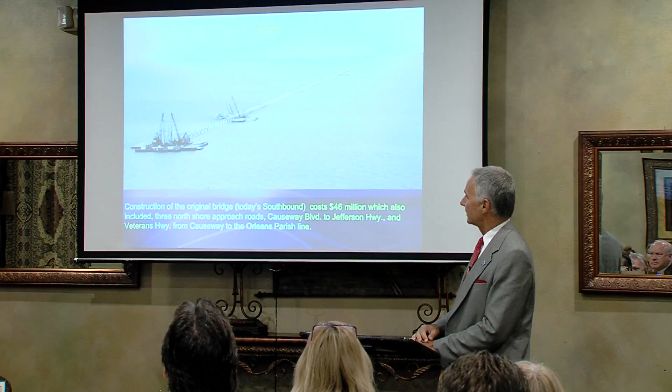History: the bridge was completed in 1956. It is still the longest bridge in the world, despite what the folks on the other side of the planet would like to say. The causeway was not only the longest bridge in the world, it was the first use of pre-stressed concrete for any bridge anywhere on the planet. It was component construction, and it was built in less than two years - the entire span was constructed. There were three basic elements: the piles, pile caps, and then the entire deck section.

The pre-stressed construction site is now presently Port Marigny. That was the construction site not only for the causeway's first span and second span, but for all of the Interstate 10 system bridges along the Gulf Coast. It was a design base for all of them, so it was really cutting edge. The first bridge cost $46 million.

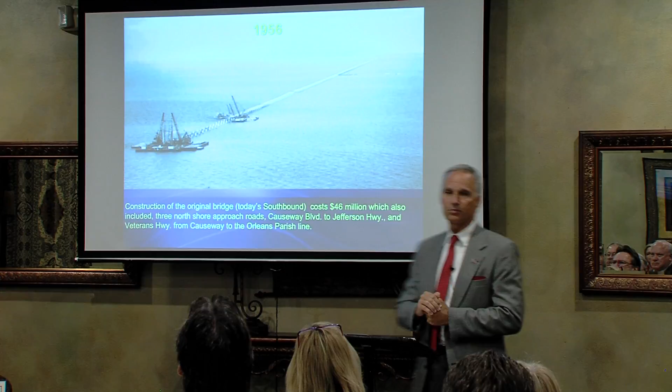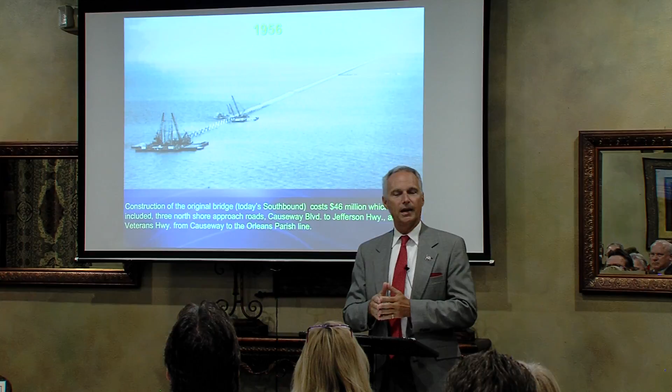That included not only the bridge, but also paving what is Causeway Boulevard today, from the toe of the bridge on the South Shore to Jefferson Highway, what was then Veterans Highway, from Causeway back to the New Orleans city line, and on the North Shore, North Causeway all the way to Covington, and both the east and west approaches.

1969, traffic had come up. Initial traffic was about 50,000 cars per year. By the late 60s, it was up to 2 million cars per year. At that point, the second parallel span was constructed. It was an additional $30 million. Again, component construction, less than 2 years to build the entire bridge.

If you drive the bridge, many of you tell me about the thumpity thumps on the southbound bridge - they're there, no two ways about it. Remember, that first bridge was the first use of pre-stressed concrete anywhere in the world for a bridge. All engineers design a factor of safety into all your projects. Because it was the initial use, the factor of safety was actually greater than typically used, and that's why you've got a larger camber in the southbound bridge, causing the clump, clump, clump between the deck sections.

Those deck sections are 56 feet long. On the northbound, the '69 bridge, they're 84 feet long. So the technology in that 13-year period had improved - the deck sections became longer. The camber is actually less on the longer sections, and that's why the northbound bridge gives a much smoother ride.

Financial history: the original bridge was $46 million. The second bridge, '69, was $30 million. The bridges were refinanced 5 times - '73, '86, '92, '99, and 2003 - either for ongoing maintenance or for major improvements. The primary major improvements that are visible would be on the North Shore, the Monroe overpass and the intersection at the toe of the bridge.

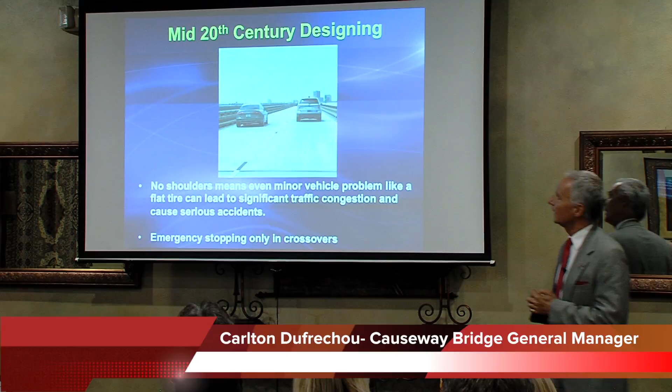20th century design. The bridge was state of the art when it was designed. The southbound bridge was designed in '54, '55, completed in '56. The northbound bridge was designed in '66, '67, completed in '69.

The biggest problem we have out there today is we don't have shoulders. Shoulders on bridges at that period were non-existent. The only emergency stopping areas we have on the causeway are the 7 crossovers, which are 84 feet square. They were never designed to be emergency stopping areas. Think about it: you're decelerating from 65 miles an hour to 0 in 84 feet, and if you try to get out of there, you're trying to accelerate to highway speed in the same distance. They were there strictly as a crossover to get vehicles back and forth for maintenance. Emergency stopping areas are the biggest problem we've got each and every day.

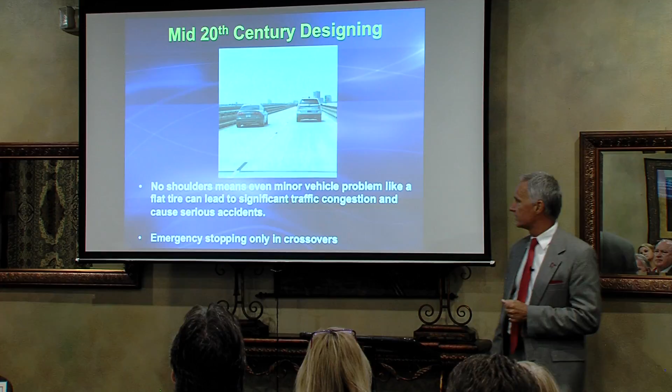If you hit it with a hammer, it will knock off. It's designed to do that. It was never designed to be an impact barrier for vehicles. It's there because, remember, there are no shoulders. This curb was designed as a haven of last resort.

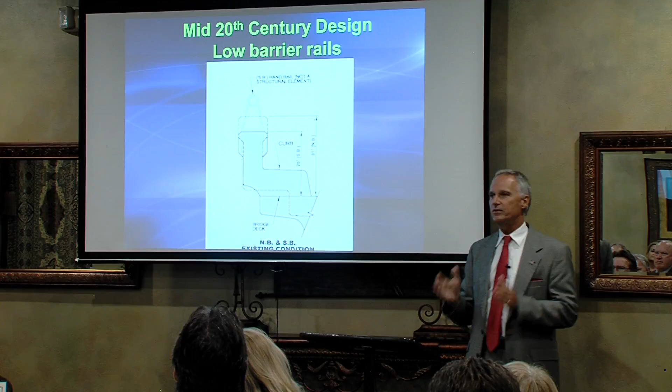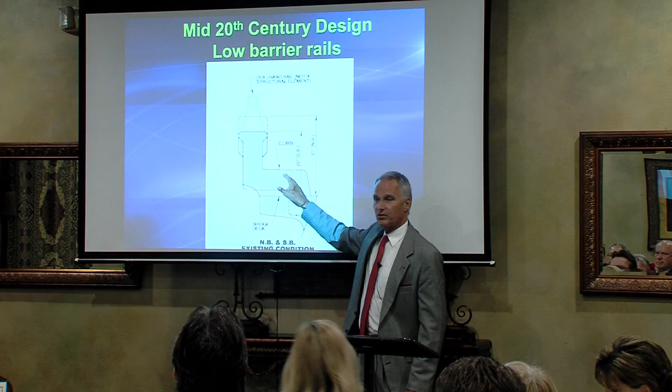If you break down, that's where we want you to go. It seems counterintuitive, but if you have a distressed situation on the causeway, like a flat tire, we want you to roll on that tire to keep going to a crossover. If the vehicle fails completely and you have to stop in the roadway, stop, turn on your flashers, get out of the vehicle, go back to the rear of the vehicle toward traffic, and then get on this curb. This is a haven of last resort from '56, and it still serves that purpose.

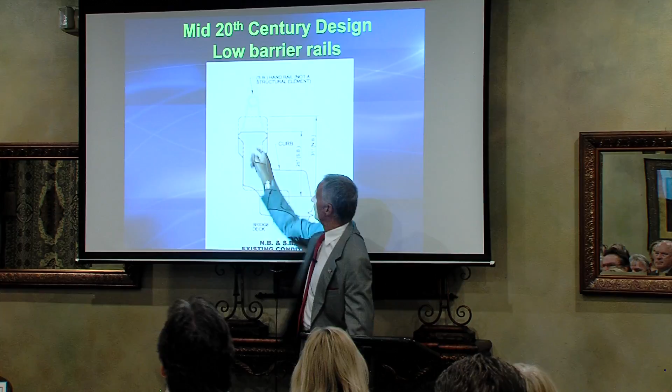It's a critical ingredient for the bridge. The northbound bridge is dotted in; the top of its barrier is 31 inches. That 6-inch difference makes a tremendous difference in safety for the vehicles of today. You'll see those in just a second.

In the mid-1990s, we started seeing a switch in the country from old farts like me who grew up with heavy Detroit iron, low center of gravity automobiles, to about 1 of every 2 vehicles on the causeway today being an SUV or personal truck. The SUVs and personal trucks, with higher centers of gravity, are designed to climb over things and curbs, and unfortunately the overboard situations we've had have been almost exclusively with SUVs.

The other challenge we've had in the last decade or so is that all of us are walking around with one or two cell phones or some kind of electronic device. It all boils down to personal responsibility — unfortunately some individuals are too tied to having these things in front of them and having to respond right away. If you're on the bridge, focus for 22 minutes on nothing but driving, and you'll get to the other side safely. Consequences of the 21st century.

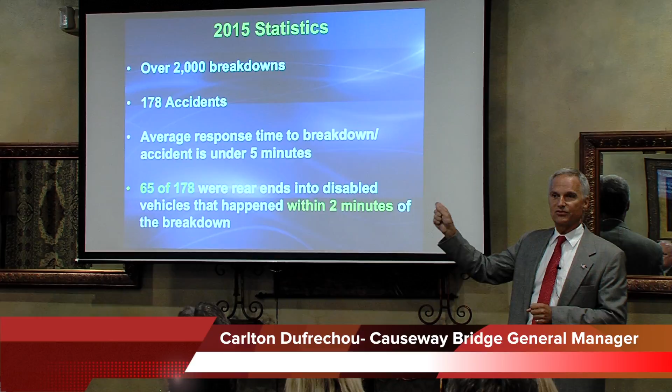Unfortunately, we've had 178 crashes last year alone in 2015. Of those, 65 were rear ends into broken down vehicles that happened within the first 2 to 3 minutes of the breakdown, before we were able to get to them. And that's the thing that keeps us awake all the time.

That's the primary reason we're pushing so hard for these segmented shoulder safety bays that we'll show you in a minute. Next one, Stace.

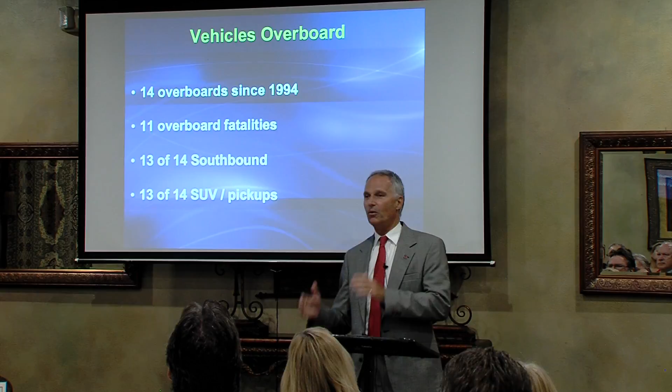Vehicles overboard: since 1994, we've had 14 vehicles overboard. Unfortunately, 11 fatalities involved in those. 13 of those 14 have been on the southbound bridge, and 13 of the 14 have been SUVs or personal trucks. The only low center of gravity automobile that went over was in a multi-car collision, a small car that was actually pushed over the southbound bridge.

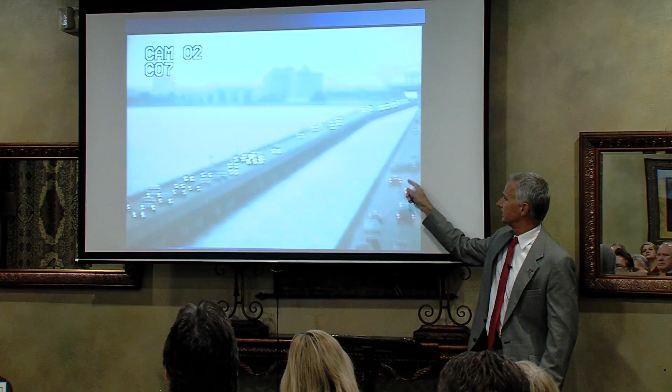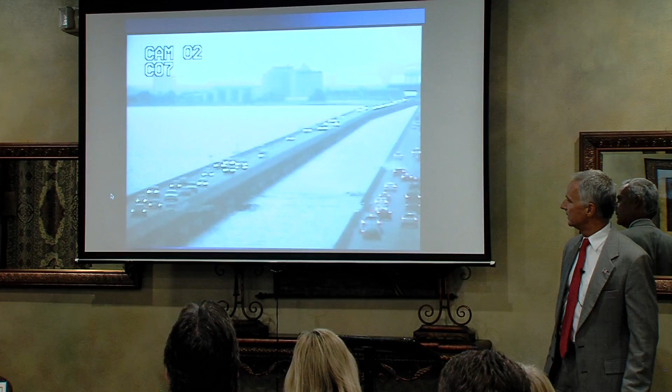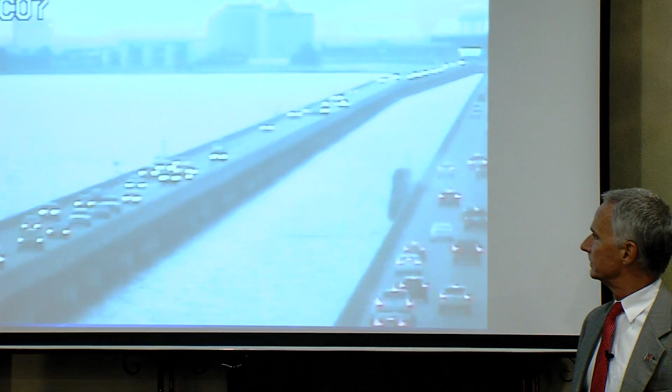Next one, Stace. Okay, watch this - it's a bit graphic. Oh my goodness. This was September of 2013, a Monday afternoon, about 4:30. It's going to be a black Ford F-250. It kisses that rail, hits this one. Unfortunately, we lost the driver.

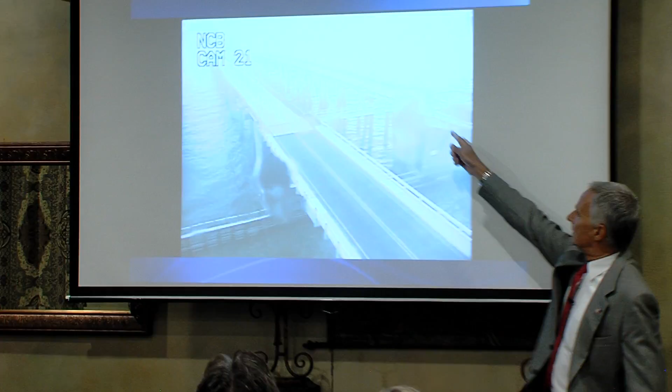Okay Stace, this next one's going to be even a little bit more. This was in November of 2014, a Sunday morning. Did they hit the side rail? Yes. Go ahead Stace, do it one more time.

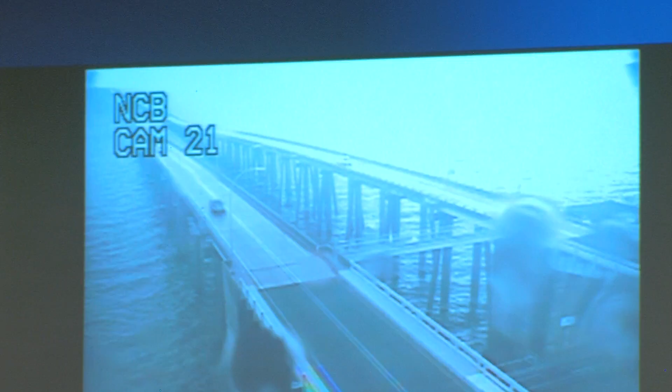That's northbound. This is going to be southbound - we're looking south right now, Lacey. Is it raining? It was wet, it was slick - the rain had stopped, but it was still slick. Okay Stace, let's go forward. Watch this - crystal clear day.

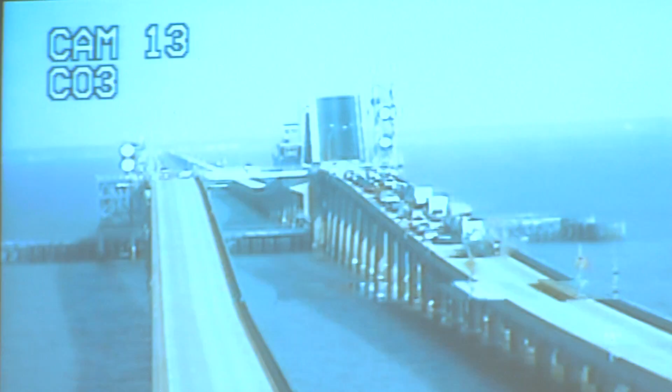The vehicle that was hit was a Jeep SUV. The lady that was in it, unbelievably fortunate, was pushed into the back of a lowboy. It started to cut into the cockpit of the vehicle - they had to cut the vehicle apart to get the woman out. I think she was hurt, but she made it, thank goodness. Those are the ones, particularly those rear ends, that concern us so much.

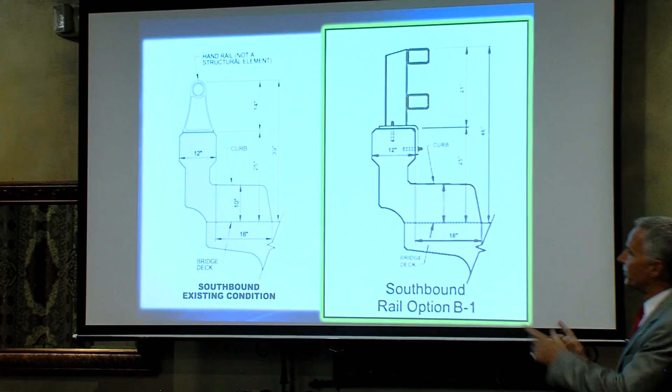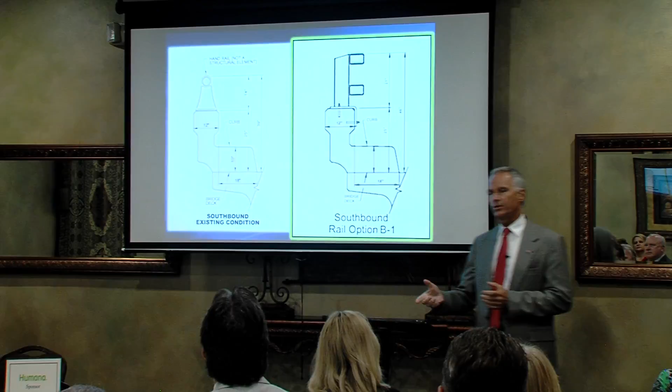Go ahead, Stace - solutions for the 2 bridges, the rails. I think you've seen a lot of the media. We started working originally over 2 years ago with our consulting engineers, then with the Department of Transportation and Development. DOTD actually put us onto the Texas Transportation Institute, and some of the crash tests they've helped us with. They've come up with 11 different alternatives. This is the selected alternative recommended for the southbound bridge.

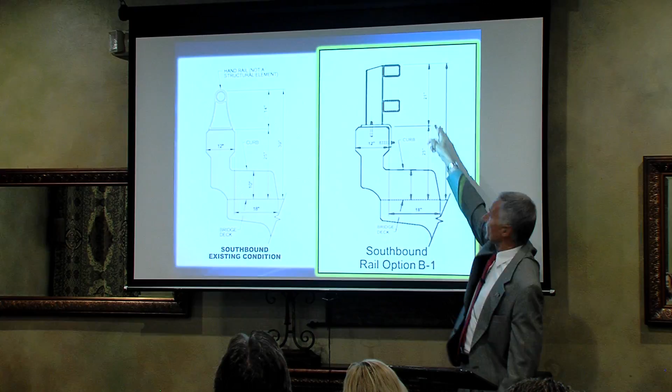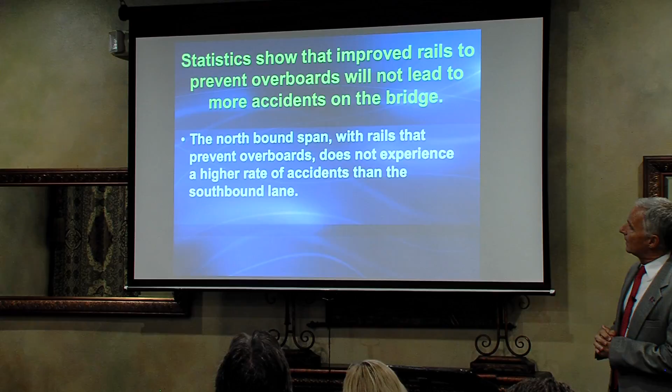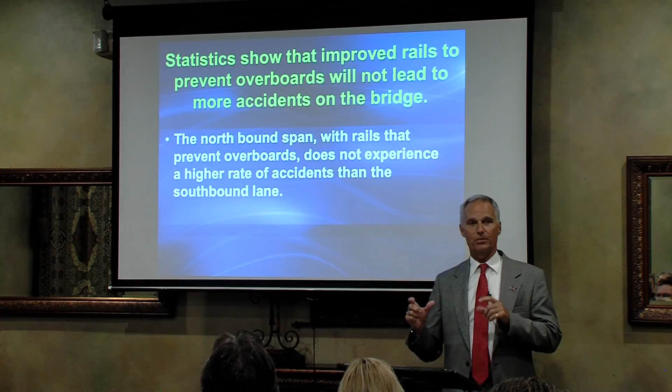Keep going - statistics. Some of the questions we had: if we put the rails on the southbound bridge, would that induce unintentional consequences, actually causing more crashes on the southbound bridge instead of vehicles going over? Statistically, if you look at both bridges over the long term, we've got almost the same number of accidents on the northbound bridge as the southbound bridge. So if that were the case, we would see more impacts right now on the northbound bridge, which we don't - more crashes or more fatal incidents, which we don't.

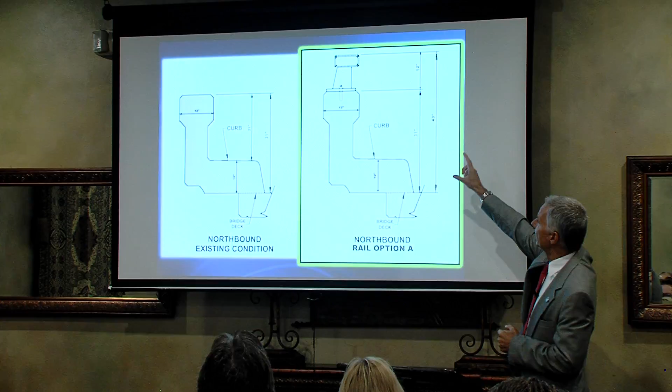Next one please, Stace. Northbound bridge, again, this is 1969 vintage. To get it up to current standards, A&M is recommending going with a single rail option that you see right there. Go ahead, Stace - that's the artist's rendition of the northbound bridge.

Keep going please. Segmented shoulder safety bay - this is where I really want to go. Remember those breakdowns, the 2,000 plus a year, the 4 at least a day? Right now we've just got those 7 crossovers, 84 feet square. The best of all worlds for all of us on the causeway.

Our dream sheet for the staff and the commissioners is to add continuous shoulders on the entire bridge. That's $1.8 billion. I'm an optimist, but that's way above my optimistic level and all the good praying we could do. Trying to be as pragmatic as we can, we're proposing - or referring to them as - safety bays.

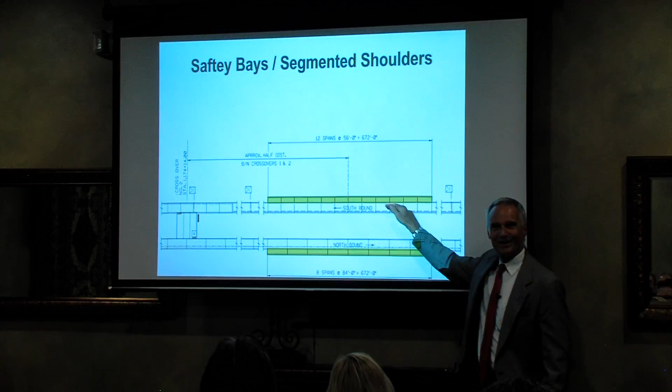They're basically segmented shoulders. These would each be 2 blocks long, 672 feet long. They would be placed mid-span between each of the existing 7 crossovers, 6 northbound, 6 southbound. If we construct these, they would almost triple the emergency stopping area on the bridge. And more importantly, you can decelerate in them easily - you can accelerate out of them easily too.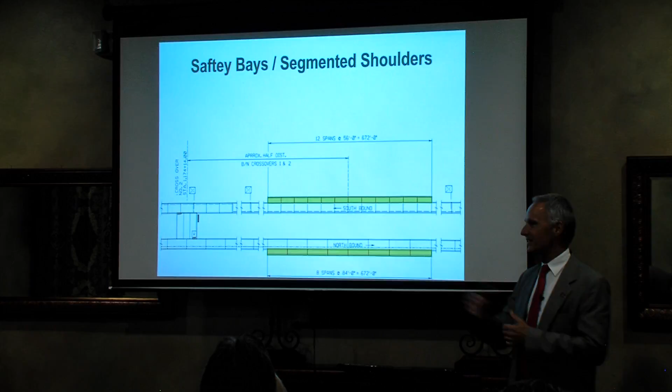They are designed so that if manna came from heaven, and Senator Cassidy and Congressman Scalise and everybody, the country's doing terrific and get all these good federal grants, you could keep going and add in between them. But these we think are...

If I had a son and I could sell that son, this is what I would sell my oldest son to try to get. These things are critical for the safety of all. I wouldn't do that, I got a little dog. Next one, Stace, that's it again, artist rendition of what they look like.

Keep going, alternatives, go ahead. Grants - I used to be semi-successful creating grants for nonprofits, but I'm not doing that great for the Greater New Orleans Expressway Commission. We've had tremendous support from the congressional delegation, from Senator Cassidy's office, from Senator Vitter, even from Senator Landrieu prior, certainly from Congressman Scalise.

They have all written letters of support to us for Tiger grants. Unfortunately, the United States government now seems to be more interested in connectivity than safety. The one avenue we're still exploring is TIFIA, the Transportation Infrastructure Finance and Innovation Act. This is actually not a grant, but a low interest rate loan.

We're in conversations with the TIFIA staff again yesterday. This could fund up to 30% of the total improvements. The problem with TIFIA is this will basically be alternative financing - you have to finance the entire project by itself first, and then the TIFIA program will come out and take out a third of that loan. It is still attractive though, and we're looking into it because the interest rate is about 2%, which is - bonds are still low, but this is even better than bonds.

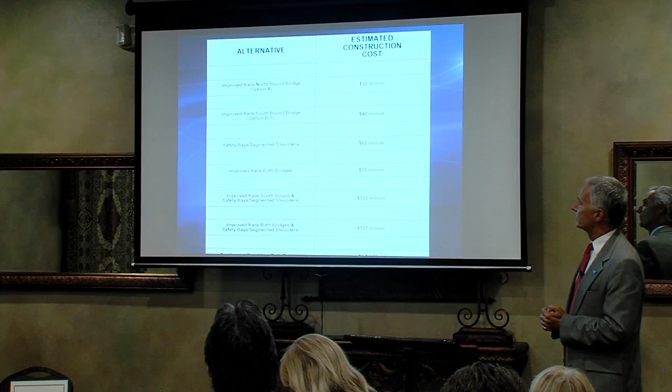Next one please, Stace. The alternatives, to run through them real quickly: everything from rails on just the northbound bridge, rails on the southbound bridge. Northbound bridge rails would be 30 million, southbound bridge rails would be 40 million. The segmented shoulder safety bays, 12 of those, are 63 million. Rail improvements on both bridges alone are 70 million.

Rail improvements on the southbound bridge and safety bays are 103 million. The rail improvements on both bridges and safety bays is 133. And you can't see down here unfortunately, the shoulders continuously along the entire bridge are 1.8 million... billion, yeah, I apologize.

We're not the Northeast. The next one, rails on the northbound bridge alone - if we could do it, that would be wonderful to have, but the northbound bridge is not our problem. Those rails, well, we'd like to get them up to current standards, they work.

Next one please, Stace. When that fell out, the rails for both bridges fell out. Segmented shoulders, again, the highest priority. And what you're hearing now are the staff's recommendations to the commissioners.

Improved rails on the southbound bridge we also believe are necessary. Ultimately, we recommended to the commissioners improving the rails on the southbound bridge and the segmented shoulders. Approximate cost of that is $100 to $105 million. We're using $103 million as a placeholder right now.

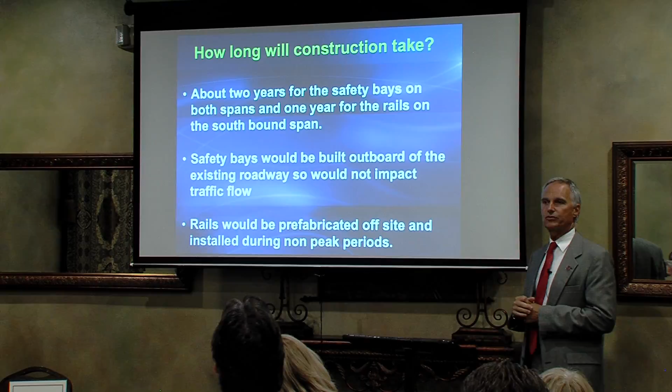Next, Stace. Okay, how long will it take? For the safety bays, we're looking at about 2 years for construction. We actually could do both projects together. We're very conscious on the bridge of keeping our commuters moving all the time, minimizing impacts to commuters, and also trying to limit the number of rubberneckers we have.

No matter what, myself included, we're all human, we're all curious. So our recommendation is to do the segmented shoulders first. Get those out there for two reasons: it's going to give us more emergency stopping area right away. If there's an incident on the bridge, that emergency stopping area will actually reduce the impacts and delays to traffic. That'd be followed by the rail improvements, which would be about another year.

The safety bays would all be built outboard of the existing roadway, so the impacts would not affect traffic on the bridge until the very bitter end, when the existing rail would be demolished and the shoulders opened up. The rails would be prefabricated off-site.

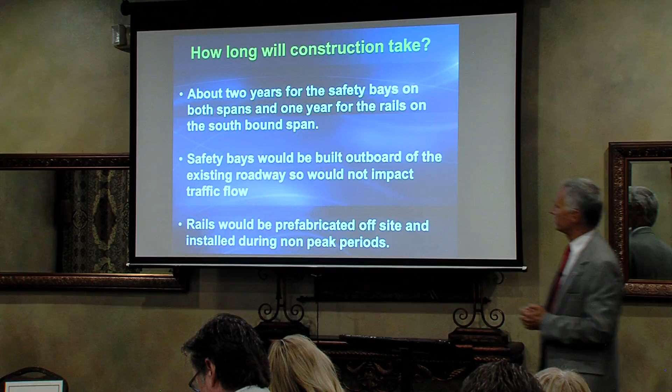Basically there'd be four things that would happen: rails fabricated, a crew would come in and start knocking down a section of rails. Another crew would follow, drilling the holes to attach the new rails. Then one more crew would follow to anchor the new rails in, and they'd be done in reaches of the bridge. That would be about a year to do those. Summary? Okay, we're almost there.

Current toll tag cost is $2, cash toll is $3. The increase we're proposing is to finance $100 to $130 million, with $133 million as a max. Our target right now is about 100 to 105 million. The tag toll would increase to finance $105 million to $3, and the cash toll would increase from $3 to $5. This would be tied to the consumer price index.

The reason we're doing that is if we did a one-time toll increase now for 30-year bonding, this would have to double. By tying it to the CPI, our financial managers tell us that in 7 years the CPI is projected to go up about 10-15%, so this would go to 330 to 340, and accordingly as time goes on. That would be a cap, tied to the max.

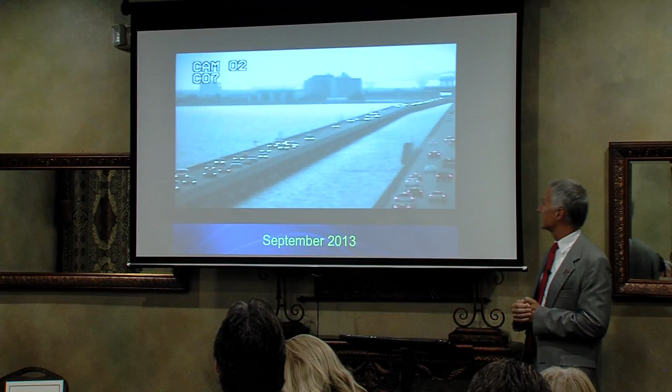Next one, Stace. Again, the reason we're doing this is to prevent incidents like this one with the SUV you saw. We'll go over it. This is work that A&M did, and we're really proud of it.

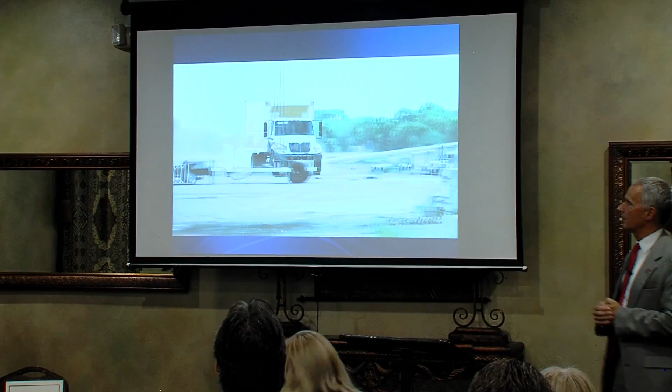It's a high-profile vehicle. You notice how it stays in the lane? It does not ricochet off. That was part of the design of the rails—they flex, so it's not a rigid, concrete face that could ricochet off. This actually absorbs some of the impact. The A&M rail meets all national criteria. These crash tests were at 72 miles an hour, and they exceed the national MASH TL4 criteria.

Not only the causeway, but the state of Louisiana—Mr. LaSalle knows this better than I—has 228 miles of bridges of comparable vintage as contemporaries of the causeway. The state is looking at these rails right now to retrofit on some of their bridges.

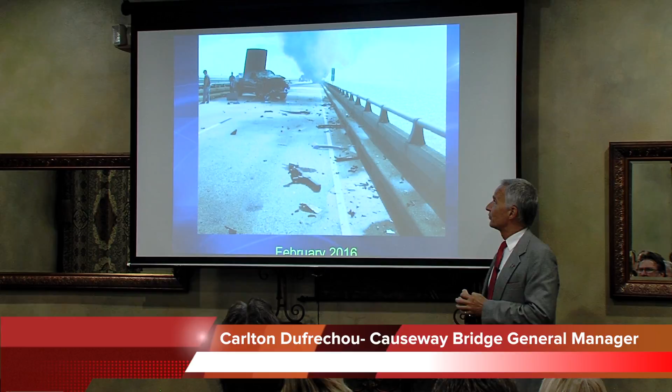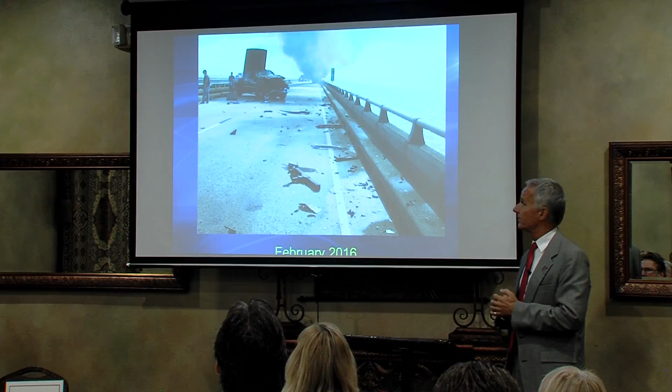Next one, Stace. This is the rear-end crash. This happened in February 2016, about 2 miles from the south shore of the causeway on the southbound bridge. We had two ladies in a truck. Their truck broke down and was rear-ended by another pickup in less than 90 seconds. The first vehicle caught on fire. We were so fortunate there was an off-duty state police officer who had just passed. He stopped, broke the windows, got the ladies out of the vehicle, and literally saved their lives.

Next one, Stace. Some of you may have been involved in the backup from this one. This was May 2016, a Thursday morning coming southbound. There was a breakdown on the bridge around the 14-mile marker southbound. We moved that breakdown just before 7 a.m., but unfortunately it induced a snaking, caterpillar effect that resulted in a 5-car crash right at the drawbridge. The individual in this vehicle had to be cut out of the car to be rescued, and unfortunately I learned this morning that while he was okay in the hospital, he contracted pneumonia and didn't make it.

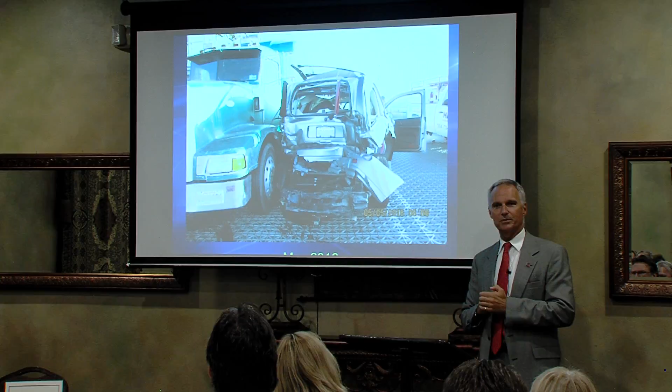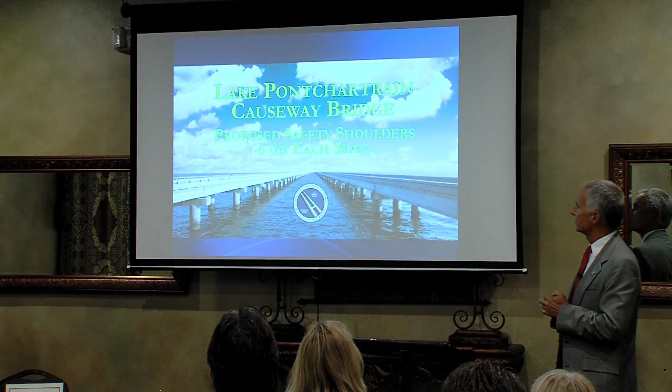Next one, Stace. Wanda, okay, I think this is going to be the little video. If you are a Pelican or a driver, this is going to show what the safety shoulders would look like. Come on—kind of like a high-altitude Pelican.

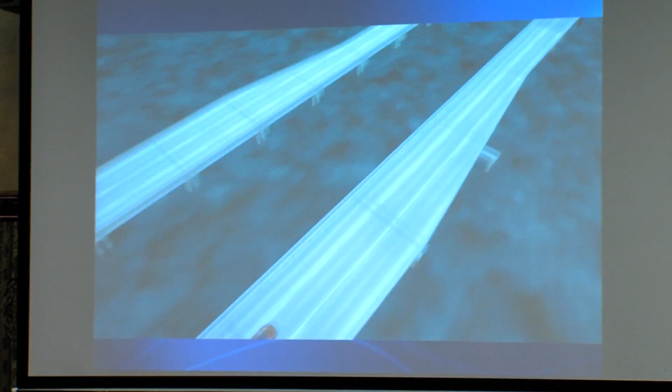You see it expanding out. These are geared at highway speed, 65 miles an hour. This is what it would look like if you're driving on the northbound bridge—you'll see it coming up on the right in just a second. It's not an insignificant length; as you can see, there's a lot of space to get in and out. I think we're almost there.

If you have any comments you'd like to give us, you can tell us today verbally, or if you'd like to write us anything, there's a dedicated comment site on our website, comments@gnoec.org. All of this is on the website along with a plethora of other information too.

Is that it? Did we get there? Oh no, we got questions. Okay, come on, we almost made it. All right, so there's quite a few questions.

The first question is, after seeing that video, do you fear anyone pulling into that shoulder and trying to pass people? That's my first thought when I see something like that. Good question—someone's going to come around and people will do that, as some of us have probably experienced firsthand. The causeway is the most highly regulated roadway in the entire state. On an average month, our police officers issue over 1,100 citations.

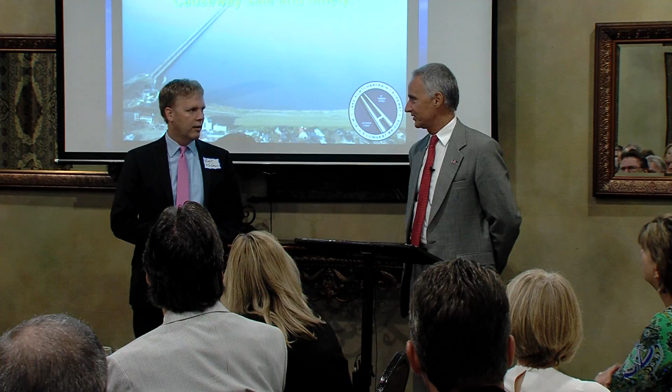70% of those are for moving violations. People do, forgive me, stupid things. We can't guarantee that somebody won't try it, but if somebody tries it, they're going to get caught.

One other thing that makes the causeway so safe is the staff. I've got a magnificent staff, I cannot say enough about them. But the other thing that makes this causeway so safe is our commuters. Commuters look out for everybody else. They are a force multiplier when it comes to enforcement. As much as I talk about people looking down texting and this kind of stuff, our commuters are the best sources of information, whether it's a breakdown or somebody doing something stupid, they call, and we want to get that, because that's the best way we can assure the safety of the bridge.

No, that's good. Okay, so I have a handful of questions. Keep on bringing them up here.

So I have a question: has this already been approved by Senate Bill 273 and signed by Governor Edwards on June 13th? No, the bonding—we went to the legislature late last year to talk about increasing the bonding cap. At that point we used a $133 million number as a placeholder because that was the max we had. We went through House committees, Senate committees, multiple testimonies, that's been advertised. What the legislature passed was giving the GNOEC the ability to bond up to $133 million.

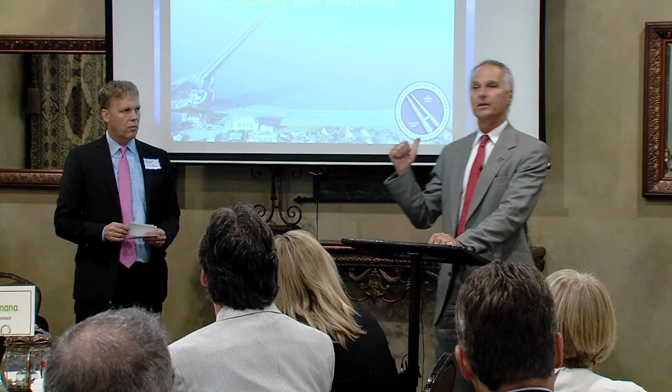Yeah, I want to say this. The reason I'm still with the GNOEC—I've had 4 opportunities to go to other places since I've been with GNOEC—the reason I stay is because of Bob Graham, Stacey Hefner, the police officers, my maintenance guys. The causeway never sleeps. These people are on duty 7 days a week, 24 hours a day, 365 days a year. I've seen them out there in snowstorms, I've seen them in hurricanes. Mr. LaSalle was out there right after Katrina. Mr. Leachy's on the phone with me whenever anything happens in the middle of the night. These people are there because they believe in the mission to get all of our commuters back and forth safely and in time. And ladies and gentlemen, they get a pittance of a salary, and they probably will not—while the GNOEC, you saw the budget, we can afford—there's no such thing as a step increase on the Causeway anymore.

Everybody gets a performance evaluation, and only those who perform get increases. I'm proud to say I have a crew of stellar performers. They were scheduled to get a nominal salary increase this year, but because we're a quasi-state entity and the governor put a cap on salaries, my folks probably will not get one. They're also seeing an increase in health benefits, so their net revenue suffers. The people I'm most concerned about, excluding police officers, are making under $40,000 a year. They have families, and that's the reason I stay out there. They sincerely believe in this work, and I'm proud of them.

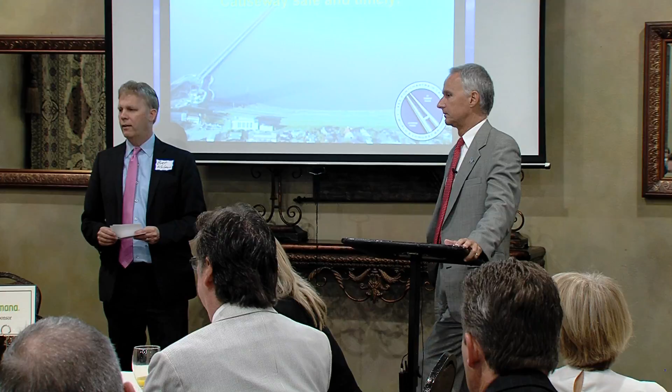The law enforcement staff is paid equal to or less than others. The downside of being a Causeway police officer is you don't have the opportunity to work special details on construction, like other officers throughout the country do to increase their salary. They can only work a special detail connected to the bridge, and there's not a lot going on there to earn extra money. Elsewhere, in any city or parish, there's always a construction project needing policemen, paying $40 an hour for special detail, which they deserve. Causeway officers just don't have that opportunity.

Question: what if you did the increase starting year one, but didn't start the project until year three or four? Could you reduce the cost, or not have as much interest cost? No. I mentioned the one-time impact—if you increase the total, it would have to effectively double in advance to get the money.

Actually, we are potentially looking at doing two bond issues. The first would be $60 million for the safety segmented shoulders, and the second would be $40 million for the rails. That conversation is still ongoing. All of this, we're trying to minimize the cost while maximizing the safety benefits.

Keep sending in your questions. There are three or four questions about money going to other parts—Huey P. Long, Jefferson Parish, St. Charles, $25,000 to the New Orleans Police Department, $25,000 for the Rec District, $5 for coffee. I don't know, they've got a very specific list here. What are you thinking? Where does all the money go?

That's part of the 1986 legislation. About $1.6 million goes to policing the Huey Long Bridge. The legislature tasked the GNOEC with policing the Huey Long in 1986, and we still do it. It was a real pain in the neck when it was under construction.

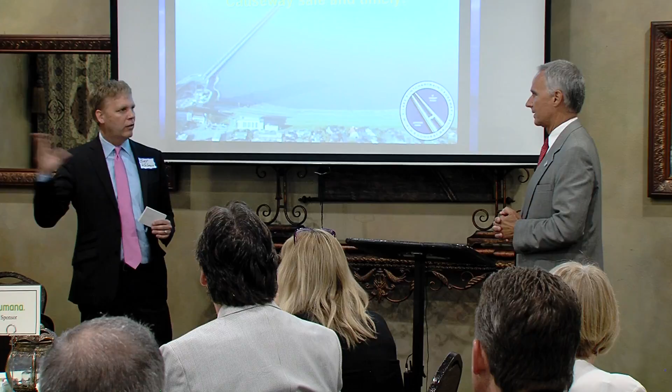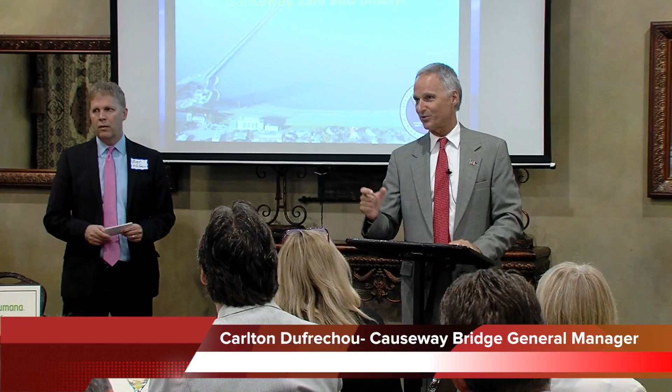Graham, Shelby, and many others - when I first came in, we tried to address the causeway. The structural maintenance has been robust. There are 9,000 piles under that bridge, and 3,000 of those have already been encapsulated. In fact, there's an underwater inspection going on, not today but this time of year, on a third of the piles.

As far as the electronics, the message boards on the bridge are 20 years old now. Unfortunately, there are no more replacement parts, so the commissioners just approved a project last month to replace the message boards. I'm very happy to tell you that within the year, we're going to be the first roadway in the state that has color boards. You'll see those in Texas, Florida, and some in Alabama. These will actually be able to display a stop sign or hazard light, that kind of stuff.

The call boxes on the bridge were cutting-edge technology when they were put in. We're the only roadway in the country that still has call boxes, and nobody supports them anymore. Those and the lights are going to be part of a presentation we're giving to the commissioners probably in 2 months. That project will come online - the call boxes probably in late 2017, early 2018.

All right, two more questions. Yes sir - when you're going southbound right now with fog, is this going to change the bad weather procedure? Is there any different procedure you'll have with bad weather once all the work is done? No, still convoy.

We convoy in the direction of the commuters, where the majority of the traffic is. With the reverse - if you're southbound in the morning, you've got 20,000 vehicles going south in the morning and 20,000 going north in the evening. So in the morning we'll convoy southbound, and we'll have a single lane operation northbound with slower traffic. We'll reverse it in the evening. So that won't change. No, that won't change.